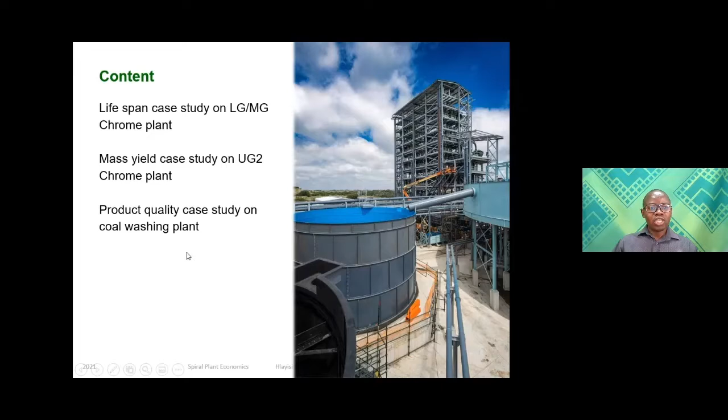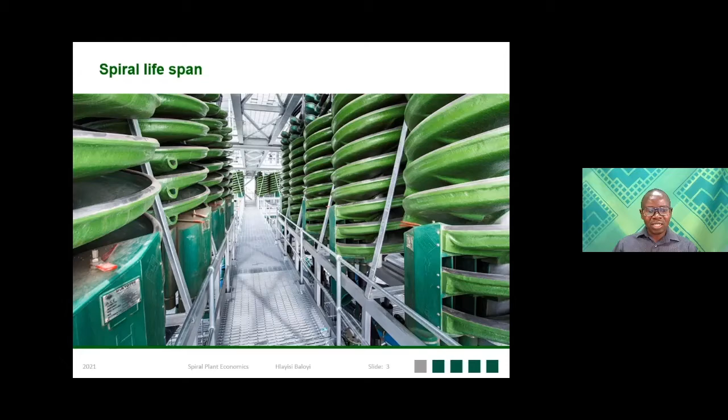So when our spirals, the green spirals, are new and everything has just been installed on site, everything looks quite nice. As you can see on this image, it's looking very good, and it's a beautiful picture. But after some time in operations, things start changing. Let's get through the lifespan and see what really happens sometimes.

So the lifespan of a spiral is estimated to be between 5 to 7 years in chromite and about 8 to 10 years in coal processing.

And what we have realized over the years was that the lifespan is mostly an issue that arises in LG and MG wash plants, especially when there's no milling, where you find that the plant there's just crushing only, especially where the crushing is done in an open circuit. We have also figured out that it also becomes an issue in metal recovery in ferrochrome.

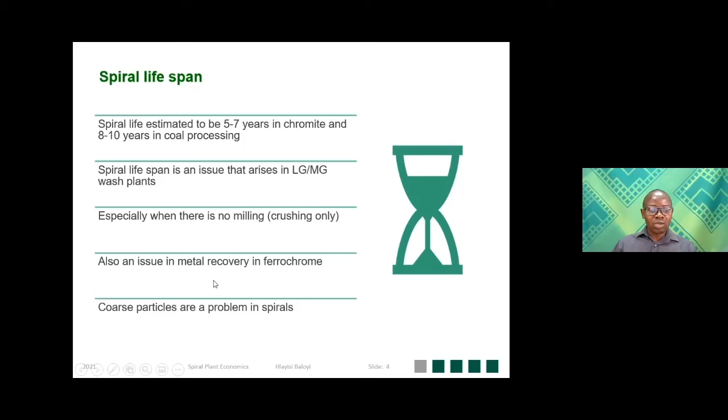So what could be the issue? We realized that the coarse particles are a big problem in spirals. So when you feed material onto a spiral, the specific gravity and particle size plays a very huge role in particle separation. But there are also other parameters that influence separation.

So what you would find is, as the material slides down the spiral, you will have the fine heavies, as you can see on the picture on the left there. The fine heavies will report towards the inner side of the spiral. And then as you move outwards, you will have the fine lights, the coarse lights. And what is interesting here, the very coarse lights you will see on the outside of the spiral, as well as the ultra fine heavies and the ultra fine lights. You will see them on the outer side of the spiral.

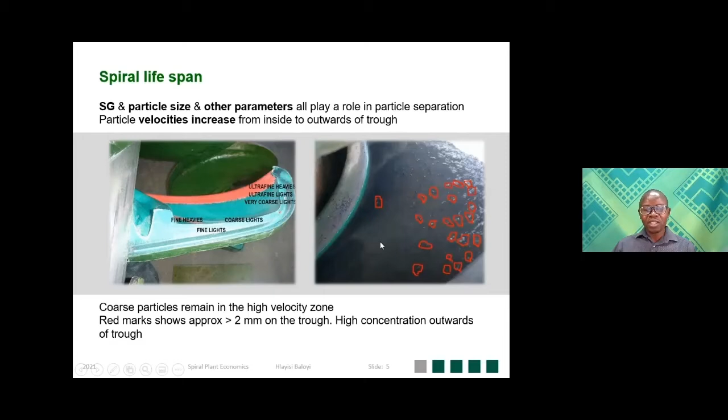So on the right side of the slide here, the image illustrates with the red dots where we could pick particles that are largely greater than 2 millimeters on the trough. What you can see is that you have got a high concentration of coarse particles on the outwards of the trough, which also implies what I've mentioned before. And on the outside of the trough, you have got very high particle velocities, it's more of the turbulent region. As you move inside of the trough, then you have got the sort of laminar flow type.

So in one of the plants, if you look at the PSD shown in this case, after crushing and feeding onto the spiral section, this type of a PSD showed almost about 89% was passing 1000 microns. So what the client decided to do, they were running with 1 millimeter aperture panels, and then with 1 millimeter aperture panels, they thought that they could be losing about 10% of plant feed as they were throwing away that oversize. Another thing with this material, the greater than 1 millimeter size had a chromite grade of around 25%, and the less than 1 millimeter had a chromite grade of above 30%. So the less than 1 millimeter was basically sweeter.

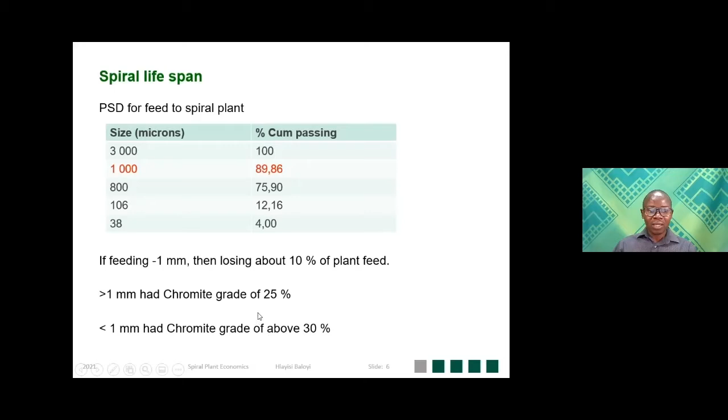And then with this operation, they felt that with the mass yield they were losing, they decided that if they could install 1.4 millimeter aperture panels, they could increase the plant feed tonnages. And indeed, the plant feed tonnages increased. But then, as I showed you, the greater than 1 millimeter had low grade, so they then also started experiencing product grade control challenges. And another issue that came up was the short spiral lifespan.

And then they also moved to an aperture size of 1.2 millimeters. So what I will show you is the impact on the spiral when they were running with the 1.4 millimeter aperture panels and when they were running with the 1.2 millimeter aperture panels.

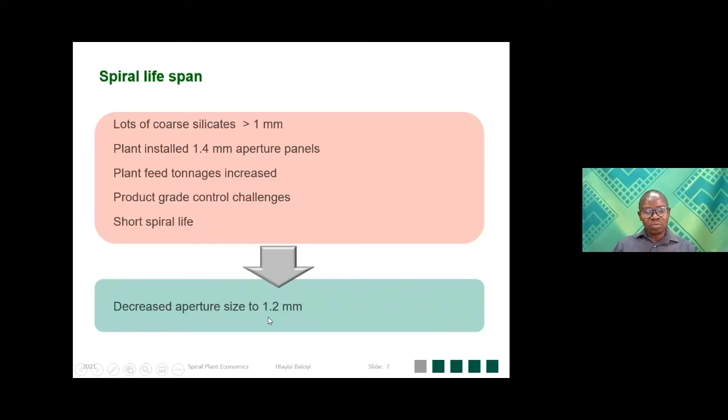In this section, with the 1.4 millimeter aperture panels, about 4 to 6 months into operation, you can see what had happened on the spiral on the outer side. This is the side where I indicated that it's got very high velocity. When you look on the inside, where there's typical laminar flow, you don't have any wear there. So the wear was happening on the outside, and with 4 to 6 months into operation, the spiral was, I would say, unusable.

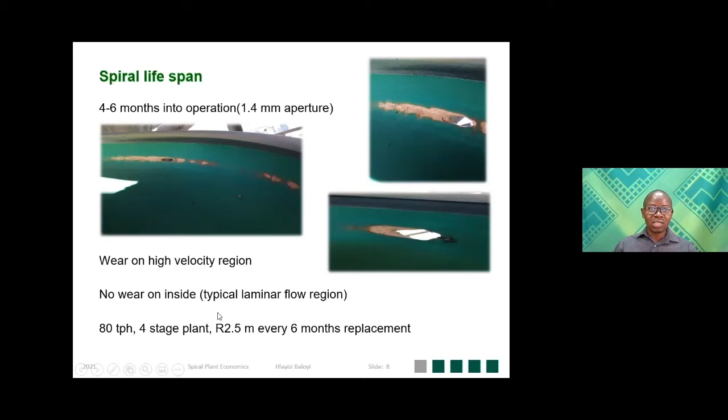And with this plant, which was doing about 80 tons per hour, a 4-stage plant with rougher, scavenger, cleaner, and recleaner, the replacement cost of the spiral was sitting at around 2.5 million rand. Which means every 6 months, they would have to spend about 2.5 million rand on buying new spirals. And this value excludes the installation cost associated with this.

So what could be the solution for this client? On the manufacturing side, we needed to add almost 400% more spiral lining or PU lining, which also comes at an additional cost, to improve the life of the spiral. But even with that, you weren't going to get to the 5 to 7 years that I indicated for chromite operations, for UG2 chromite operations that I highlighted before.

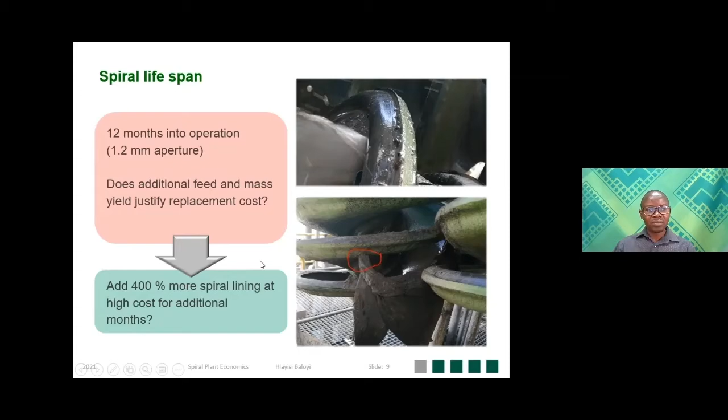So does the additional feed and mass yield justify the replacement cost? This is the thing that I would say plant personnel need to go through when making this type of decisions, and also to justify the impact that the coarse material has on the spiral.

In this picture, we took a UG2 feed where 80% of the material is passing 75 microns. In figure A, on commissioning, you can see the spiral surface is still looking green, everything is still looking nice. Then 6 years into operations, you can see that you don't have the type of holing that we saw on the previous slides, because the particles being treated here are fine material. So you can see the amount of life you can get out of the Multotec spiral if you're feeding fine material.

And if you look at image B, you can see some marks there, and those marks are largely due sometimes to scats. So sometimes you also need to take care in terms of scats removal upfront, because they also have an impact on the spiral life, but not as much as we saw with the coarser particles, greater than 1 millimeter size.

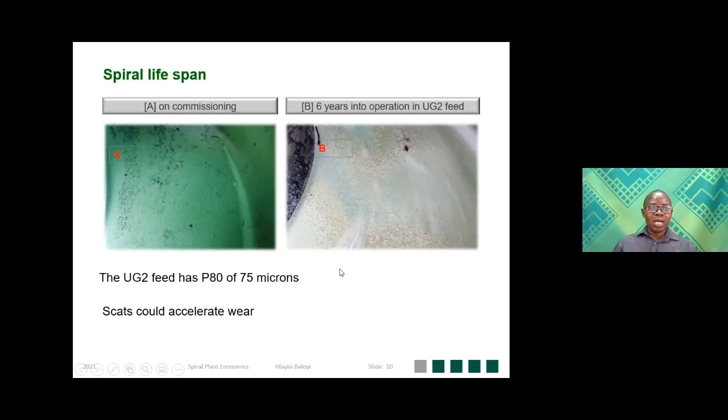So next on my case study is looking at mass yield on a UG2 chromite plant. In this plant, they were feeding 244 tons per hour with about 11.4% chromite feed grade. And out of 244 tons that they were feeding to the plant, they were only producing 14 tons per hour of concentrate. What happened to the 230 tons per hour?

This is going to the tailings. So here we could see that we have got a problem. You can't feed 244 tons per hour and lose almost 230 tons per hour.

So normally during the design stage of a plant, we specify that the desliming cyclone needs to deslime at around 45 microns. Because the issue with the slimes, as I've indicated before, is that the ultrafine slimes move onto and run onto the outside of the spiral. So most of the time they end up in the tailings, and they also change the viscosity of water, which has an impact in terms of separation. So we normally specify that the feed to the spiral should have less than 10% below 38 microns.

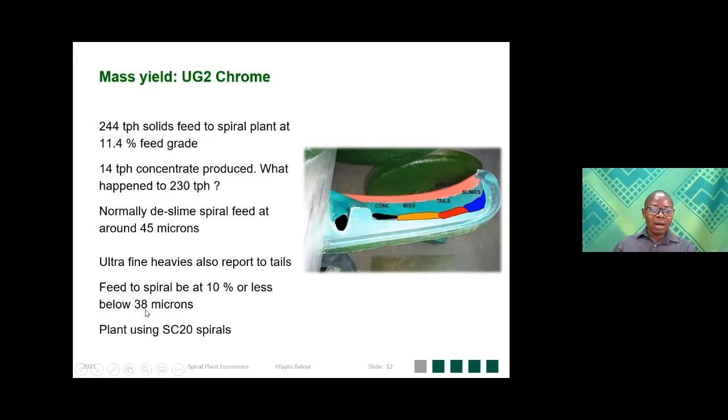Then let's see what was happening to the feed that we were feeding to the spiral.

Why was 230 tons per hour going to the tailings? So when we look at the feed, at first we started by doing sampling around the cyclone section, the desliming cyclone. With the feed going to the desliming cyclone, we found that we had about 53% passing 45 microns.

Remember, we spoke about desliming at 45 microns. We also found that at the desliming cyclone section, about 74 tons per hour was going to the overflow.

Which is almost 30% of the feed, which we are already losing right here at this stage. And when you look at the assay by size of the feed, the plus 45 microns feed grade is sitting at 10.4, and the minus 45 microns feed grade was sitting at 13.2. So on the minus 45 side, that's where you had, I would say, good quality feed as well.

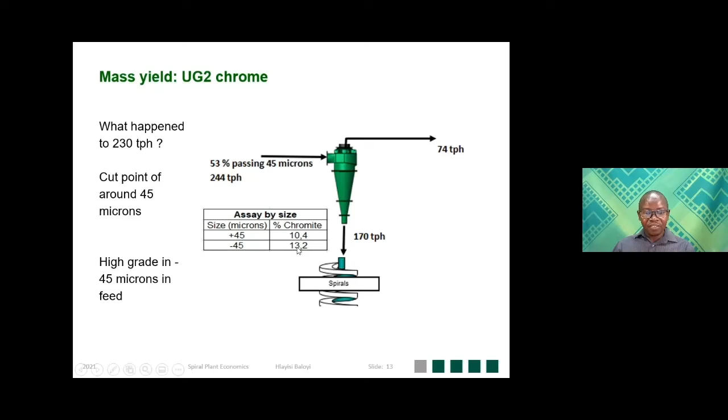So with 170 tons now going to the spiral, what was really happening on the spiral? Looking at when we sample the tailings of the spiral, with about 156 tons going to the tailings in this section, you look at the assay by size: the plus 45 microns is now sitting at 7.2% chromite, and the minus 45 is sitting at 13.1.

If you go backwards, the plus 45 was sitting at around 10, now it's sitting at 7.2. So you can see that separation was largely happening on the plus 45 microns. When you look at the minus 45 microns, the grade didn't change at all, which illustrates that the minus 45 microns, which is also a high grade section, wasn't separating on the spiral, meaning much of it, or all of it, was reporting to the tailings.

And it also adds on to why we were getting around 14 tons per hour, which is almost like 5% mass yield.

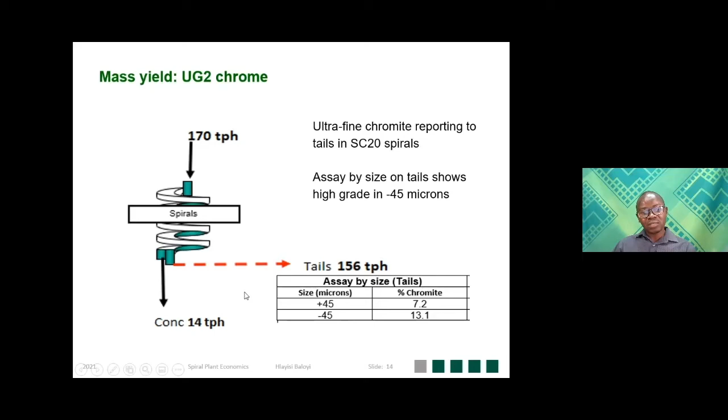So how do we solve this type of a problem? That's where I'm going to introduce the UF7, which is an ultra-fine spiral. It's a shallower 7 turn spiral, giving more residence time to the ultra-fine particles. And with this spiral now, instead of desliming at a cutoff around 45 microns, it allows one to drop it to 25 microns.

And also, as we have seen that the high chrome content was in the minus 45 microns, this allows us to give a chance to the minus 45 microns as well. Hence we can then send more solids to the spirals. And what we have found is that the UF7 spiral can handle the ultrafine material much better.

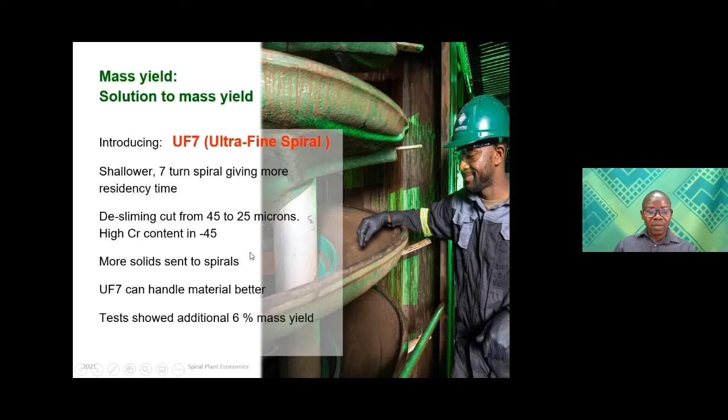The tests we did were first at Multotec, which showed an additional 6% mass yield that can be achieved if we were to implement this with the same material that we were running on the SC20 spirals on site. So what does that mean in terms of finances?

The 6% mass yield means you can almost get an additional 19 tons per hour in terms of conc, for this same plant setup.

And in this case, I've excluded the option of changing the configuration of the desliming cyclone, so that instead of desliming at 45, you deslime now at 25. So looking at this material...

With chrome price at around 1,200 per ton, and with 400 operational hours per month, you're looking at a difference of around 2.4 million rand per month, which over a year could be talking about, I think, $2 million a year. The introduction of the UF7 spiral into this flow sheet will be a lot of money.

And also, the more you are adding to the tailings, the more cost you're putting in terms of tailings management as well.

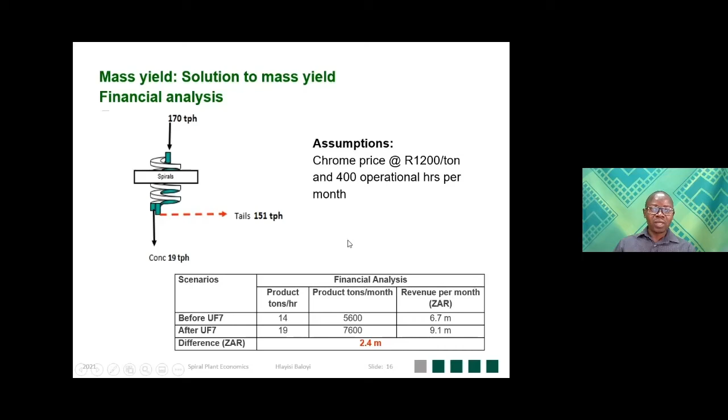So I will finish off with a case study on product quality issues that we also came across in a coal operation. In this coal operation, the client was having challenges in terms of product quality, which was varying significantly. The client was getting around 33% ash in the product, and they were aiming for below 20% ash in the product.

In this case, they'd heard about the SX10 low-cut spirals that Multotec has. So the client thought they wanted to go the route of the SX10 instead of the MX7 spirals, since they had thousands of tons of off-spec product that they had stockpiled.

In this case, the spiral plant mass yield was very high, but they were having an off-spec product. So when the client approached us wanting to install low-cut spirals, we first had to do our own sampling on site to see if it was worthwhile to move to a low-cut spiral, or if it was something related to the process around the plant.

So we had to do sampling over a couple of days around the fine section of the coal plant. In general, what you need to keep in mind is that in coal, we normally try to keep the below 106 microns at below 10%, unlike in heavy minerals where we normally aim for 38 microns, as I mentioned before.

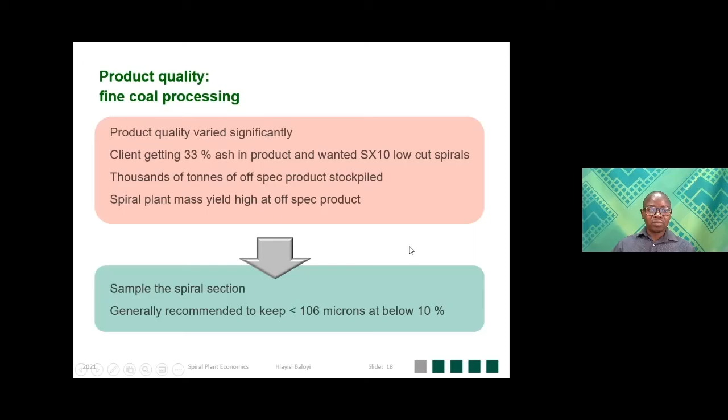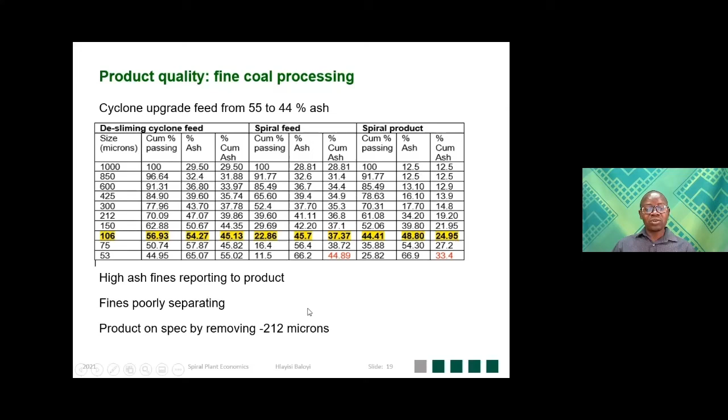So what did we have to do? We had to call in our cyclone expert, Aaron, and look at the cyclone configuration, changing it so that we could send more of the fine material to the overflow. But one needs to bear in mind that the more overflow you're sending, that might have an impact on your thickener as well. So it needs to be a full holistic approach for the whole plant.

With that change, we ended up sending more of the below 212 microns to the overflow. As a result, we could get the product quality coming in at around 17% ash. But in this instance, as you saw before, about 70% is below 212 microns, so the overall mass yield dropped very significantly. The good thing is the product was now coming on spec, but at a low mass yield - still, it's now a sellable product.

So the lesson we got out of this processing unit was that it's very important to understand the assay by size, as well as the washability, when troubleshooting product quality issues on a spiral plant.